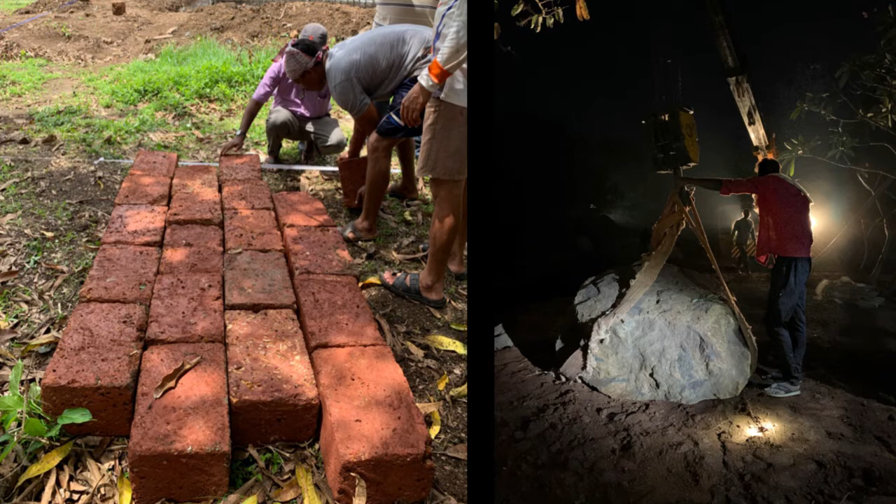My design process is a non-linear one, where I practice with immense joy of making, where I involve and participate myself in the building practices, be it arranging the laterite blocks for the paving or locating the large boulders into the site or into the landscape.

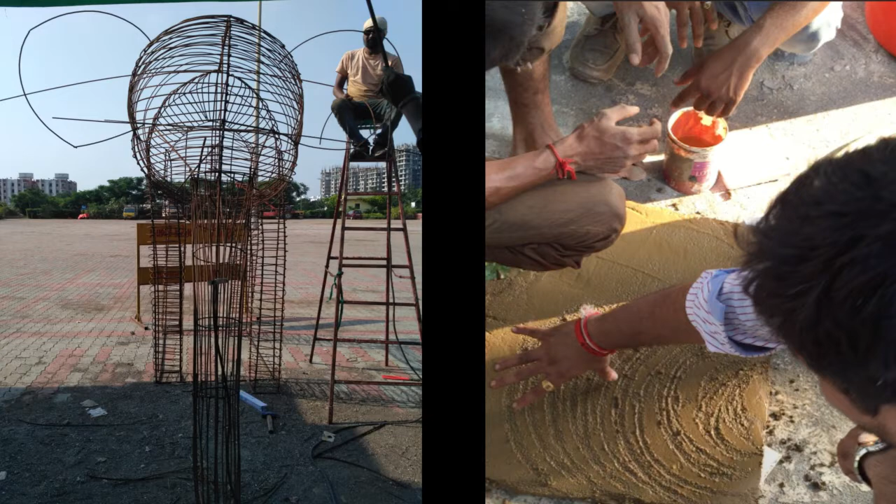I try to involve myself with the conversation that happens at site, engaging with various aspects of the site, which really folds and unfolds the design process. There is a joy in witnessing this process of making, which defines my practice.

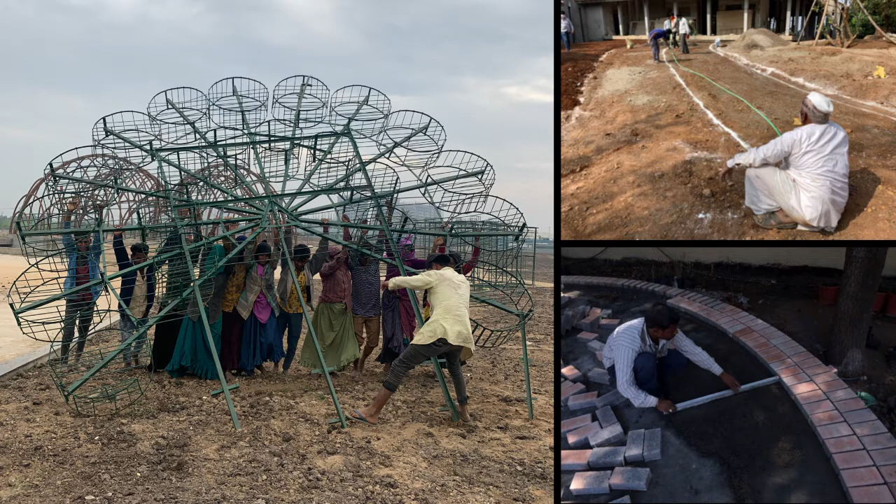I would like to share this experience through few of my projects. To start with, first, a natural ice cream parlor in Juhu. The brief given was to create a unique experience with nature, as the brand is called Naturals.

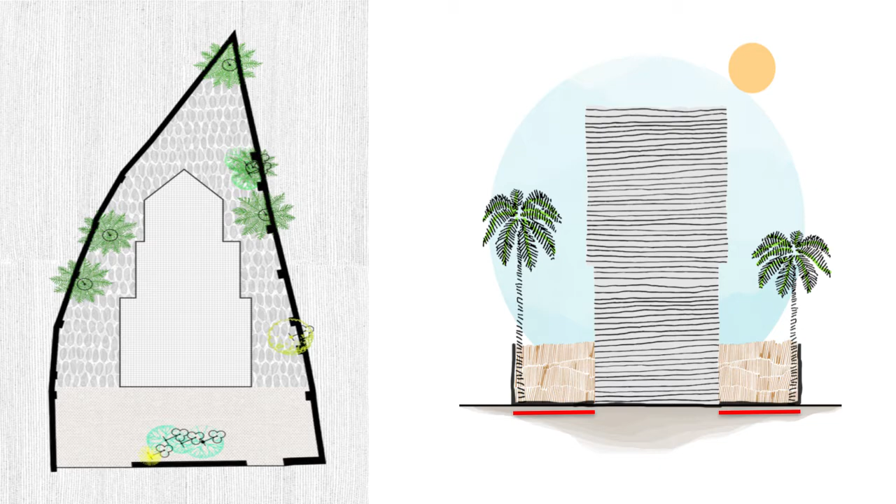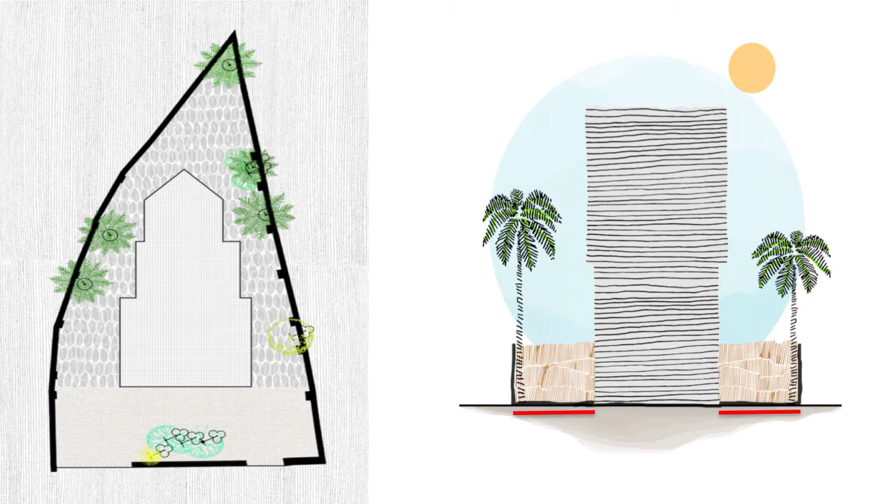The site is a triangular plot with a narrow marginal space of 5 to 6 feet, which was the only outdoor area of the experience. The design aimed that it should look less like a store and more like a park. That was very challenging, and we started this whole approach to create an enclosure which cuts oneself from the hustle bustle of the city.

The idea was to create the canopy where the structures become almost invisible and the creepers take over the space. It was detailed in such a manner that simple rectangular frames connected with thin wires would allow the creepers to go over it and make the space.

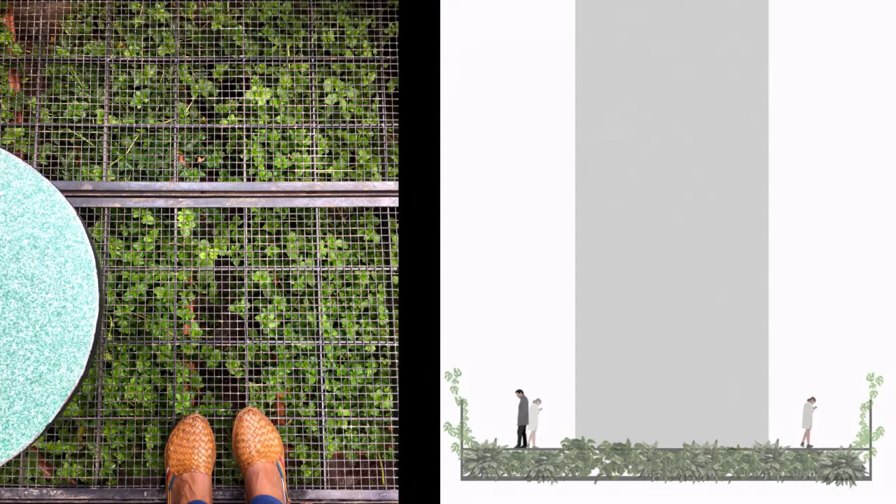While doing this, we realized that what if we could explore the floor too? As part of this whole experience, we imagined what it would feel like while walking over the greenery. That would surely give a different dimension to the space.

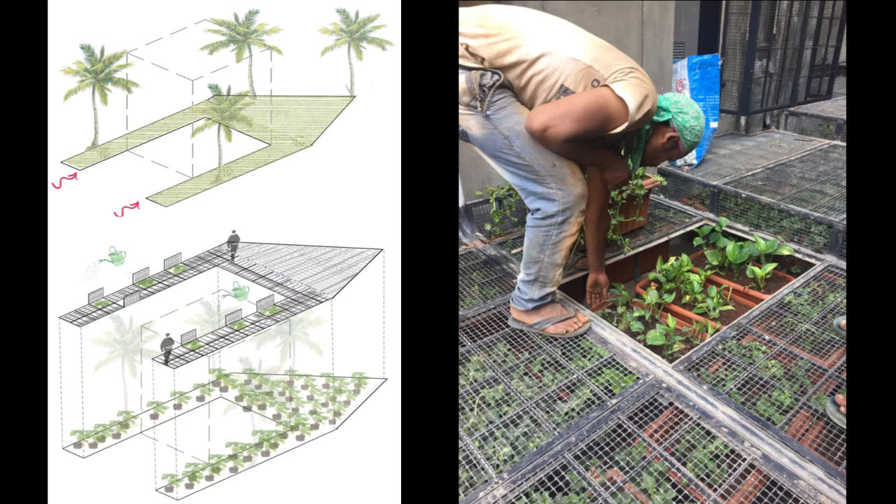We further developed this idea and made customized wire mesh panels, detailed in a way so that it could be easily maintained. Being a commercial property, it was important to consider the maintenance, where one could water the pots or clean accordingly, and easy to lift.

We placed around 450 pots beneath the jali and created the floor surface to walk over it. This is what the space has grown to - it has almost become a cocoon which gives a unique experience.

The light penetrating through these creepers creates an interesting pattern on the various surfaces of the space. The punches in the canopies bring back memories of a walk in the woods. The twisted branches take me back to the space that I was inspired by earlier.

The next project is BKC Sculpture Plaza. The site is located at Kalanagar Junction, one of the busiest junctions in Mumbai. The site was envisaged to be an entry point to BKC. The vision and design of the sculpture was already finalized before we came on board.

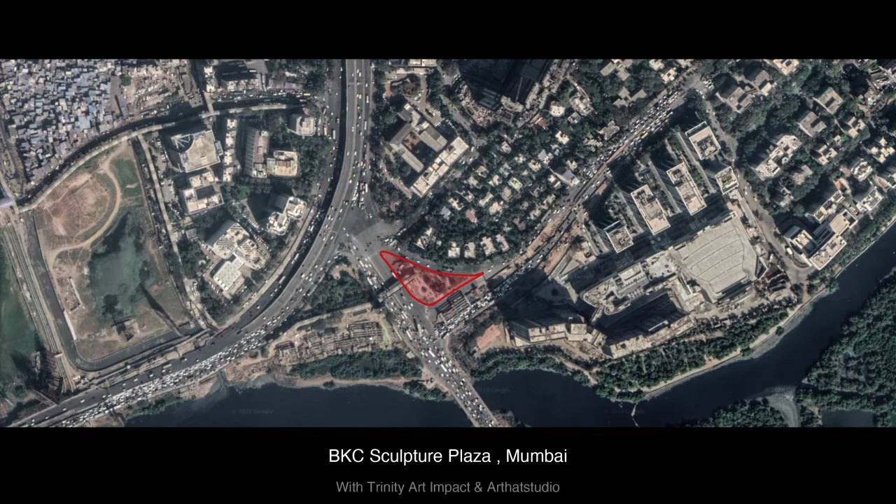The site is surrounded by roads on all three sides with constant vehicular movement. This area is busy not only in terms of vehicular traffic but also pedestrian movement, where one daily commutes from one end to the other. This made us realize that we should create a space which will become a pause point for the daily commuters.

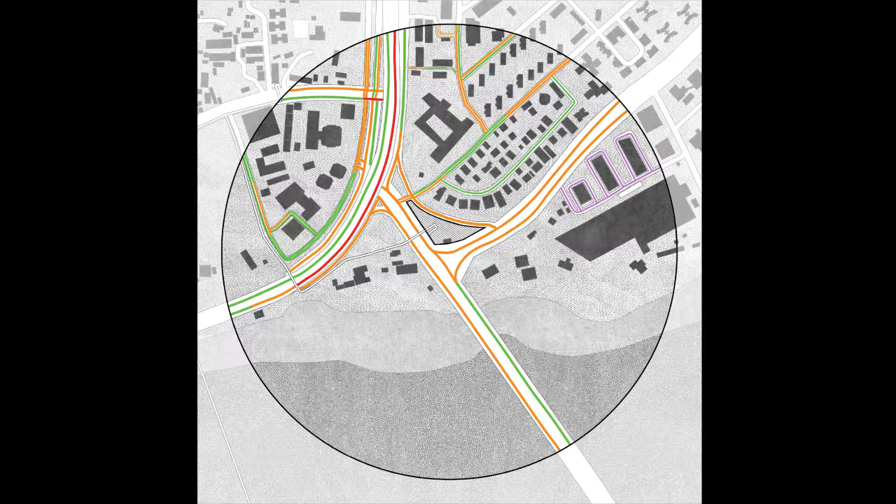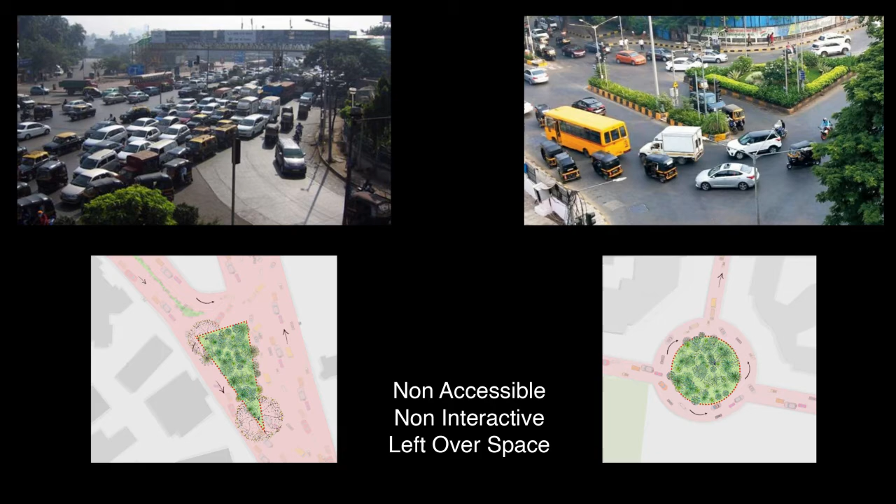We did a quick study to understand how traffic islands were treated and imagined. We realized most of them were either non-accessible, non-interactive, and almost felt like a leftover space in the city. The existing site was treated in a similar manner - it was in a state of abandon.

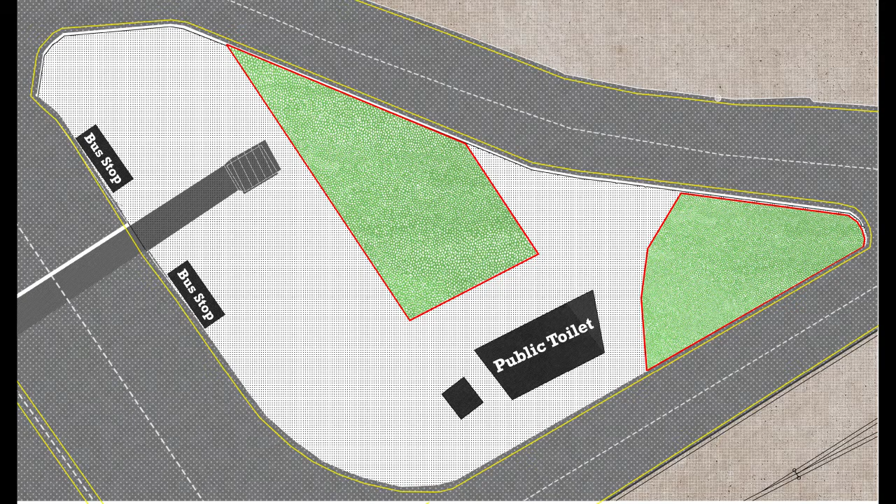The entire island was divided into three parts: paved, green and utility areas like toilet block and bus stops. These three separated spaces acted as independent entities. The existing garden was a non-interactive space, treated like a so-called green patch.

We thought of spreading these green areas evenly throughout the plaza. The benches were very well placed and designed, which looked as if they emerged from the BKC sculpture. Even the paving was evolved from the geometry of the sculpture.

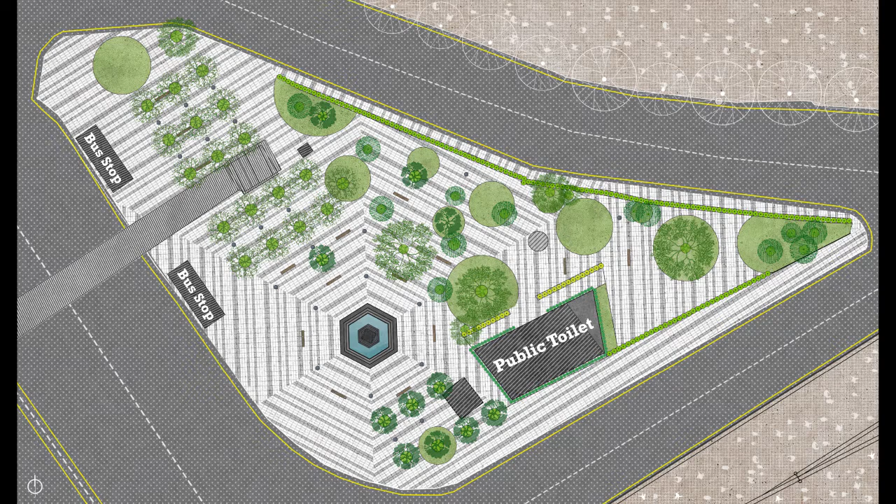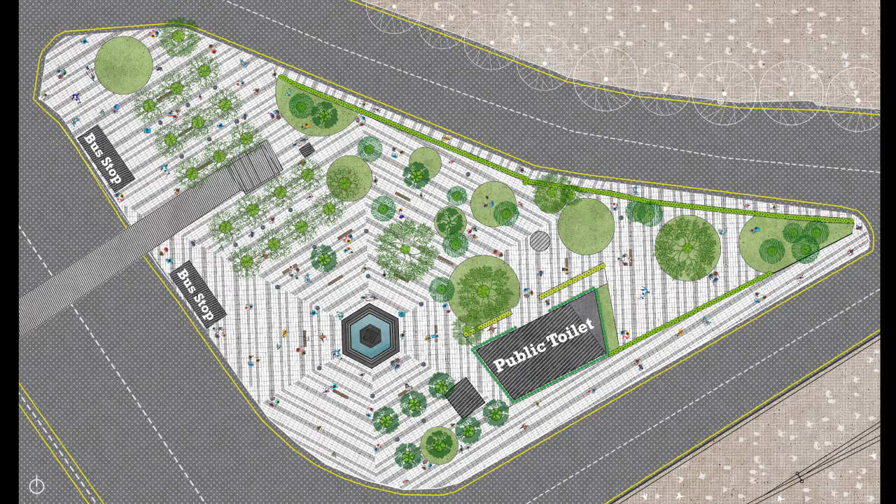The benches were carefully placed near and under the trees, as well as facing the sculpture. The plaza now functions as one entity where one enjoys the different experiences of pausing. So this is how that space has come up.

The space allows one to sit for a while. We imagined this place where one can have a quick nap, lunch, chat, read, discuss or write.

The lighting was also carefully designed with a set of simple linear poles so that it could light the space evenly in the night. It was also important that it doesn't look bright and stand out within the space, and almost creates an extension of the BKC's corporate structure language.

Last project that I would like to talk about is Avasara Academy. This project is a very important part of my learning curve and the way I practice. Just to brief you, this is a residential school for young girls located in the outskirts of Pune. This project had various collaborators, with architect Case Design, Rameshwarji, Abhijit Pandya, Malika Mama — these are a few important people which helped us in shaping this project.

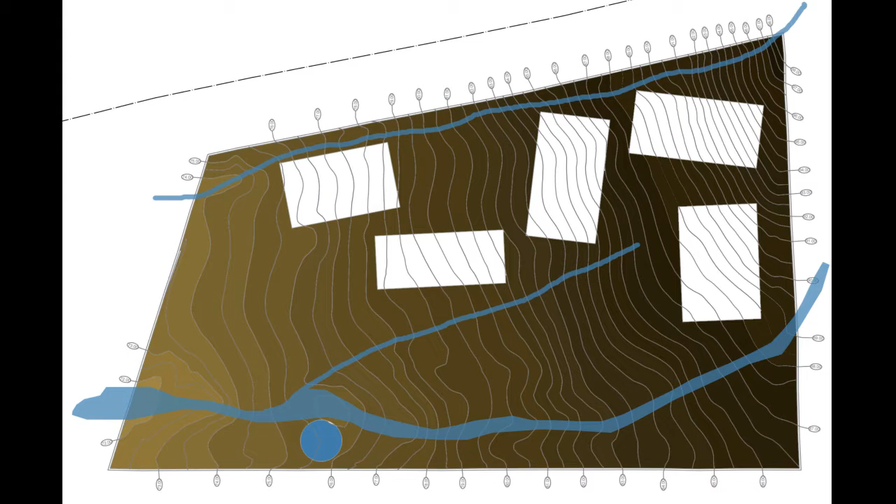We did a basic slope analysis and tried to create or tap primary streams running through the site. We did a lot of water related studies. Various options were explored that could allow us to harvest water, like mini check dams, rainwater harvesting ponds, and swales — they were part of continuous explorations.

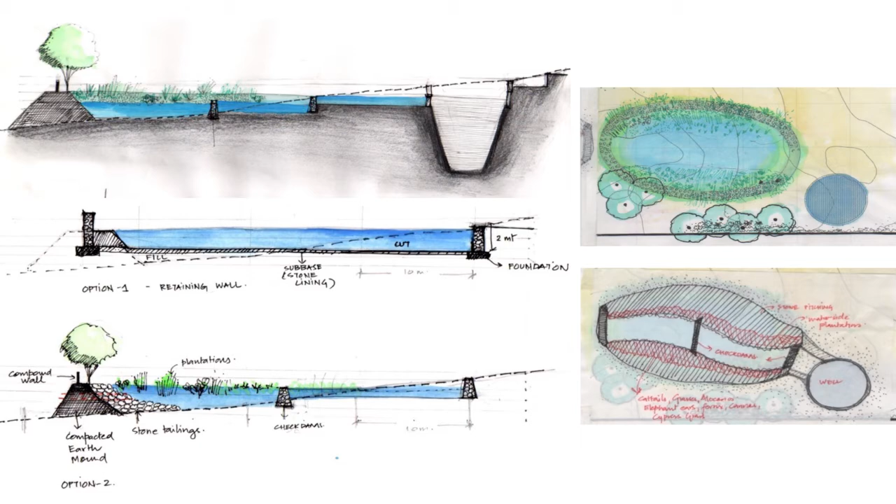The master plan kept evolving with time and conversations that happened with various collaborators. It was never constant — we always had a little bit of shifting here and there, arranging and locating every aspect of the landscape, while also considering the built form.

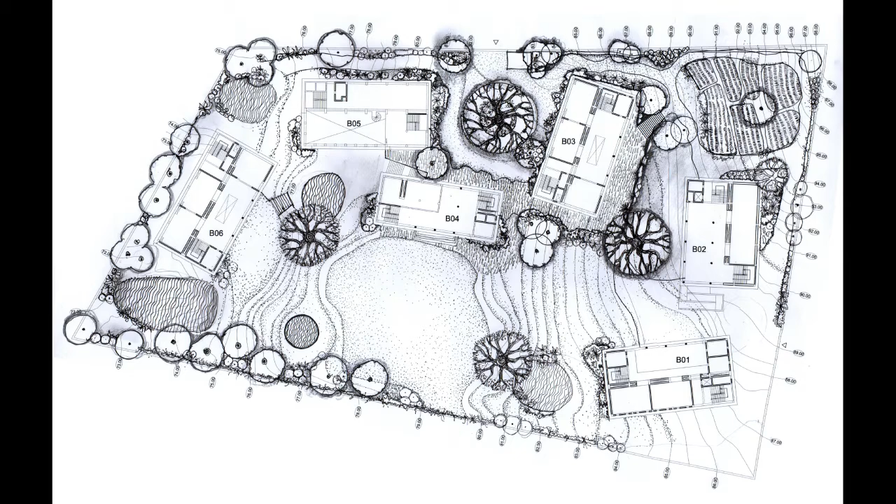While developing the site, the prime focus was to use local resources and techniques which would be cost effective as well as appropriate for the site. Costing was a very critical concern, which shaped landscape strategies like local farming, local construction methodology, and setting up a plant nursery — these were the few things we thought most appropriate for this kind of site.

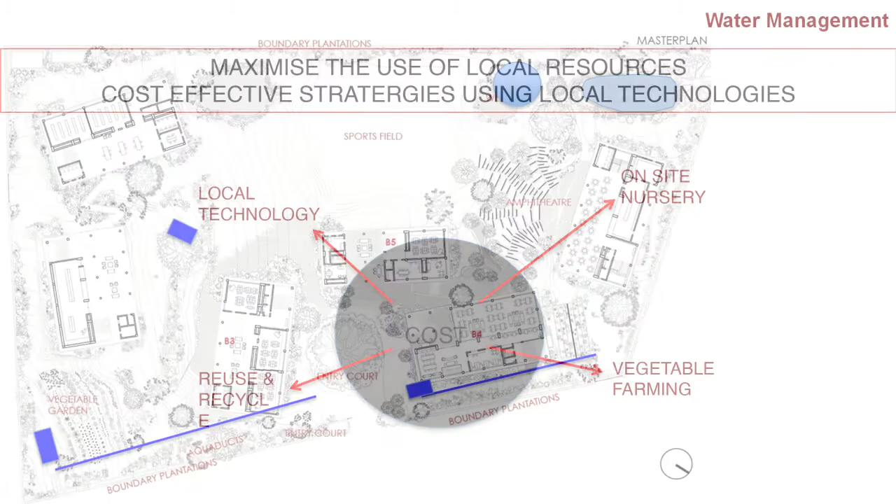The water management plan was developed in reference to the previous studies we made, which I would like to explain in detail. These rectangular blue boxes are the landscape tanks, the linear lines are aqueducts, and there's the location of the existing pond and polishing pond. The only source of water at the site was the well.

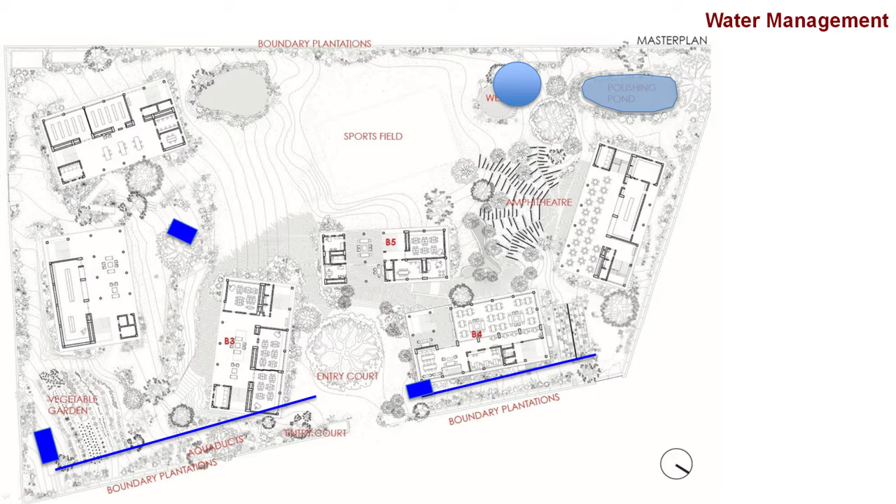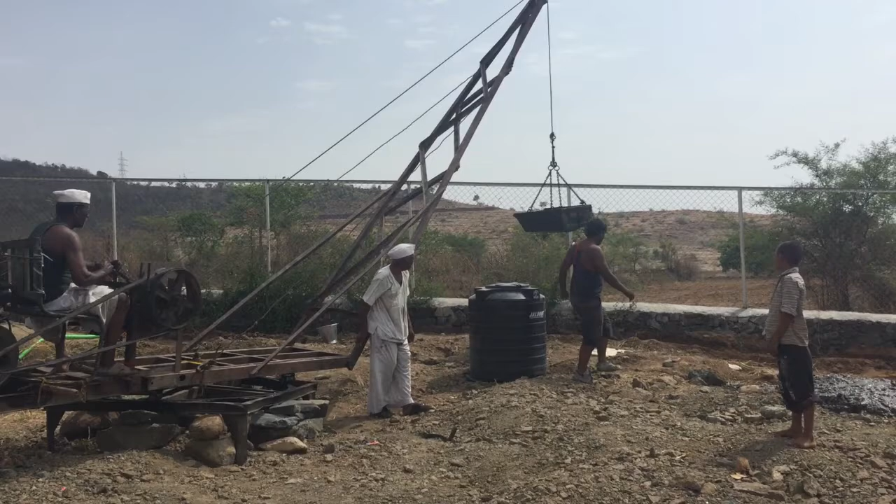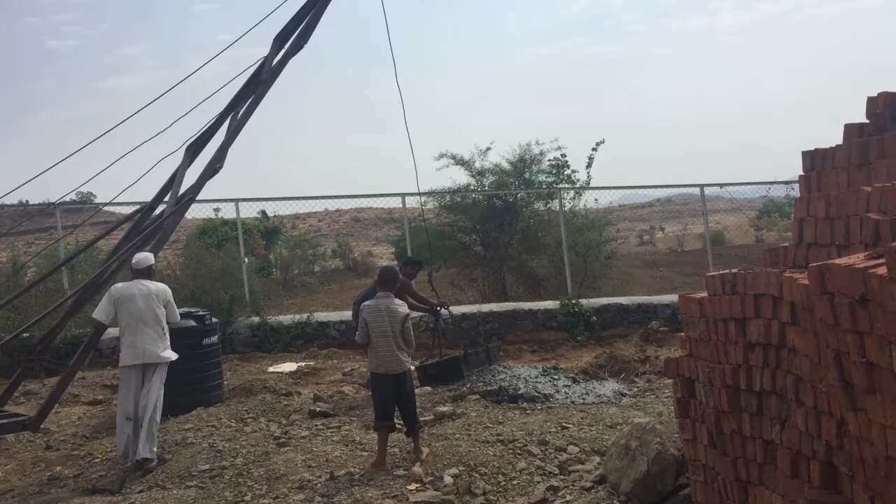So we started dredging and constructing the well as part of the first program of implementation regarding water. This is a diesel pump operated dredging device which was locally sourced and used for cleaning up the well. This is how they cleaned up the pond and the dirt beneath the bottom of the well, which had been lying there for years.

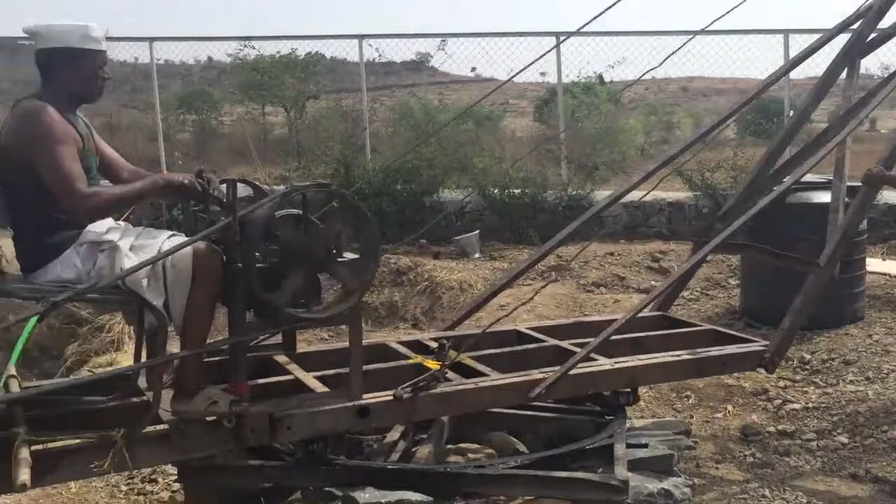We involved local people who knew how to construct wells. They exactly knew which was the best time to clean and make the well. We gradually formalized the well. This kind of small interaction helped with sketches or no formal drawings, so we almost did everything on site, measuring it and calculating the depth of the water. All of this happened with constant presence at the site and collaborating with the local people.

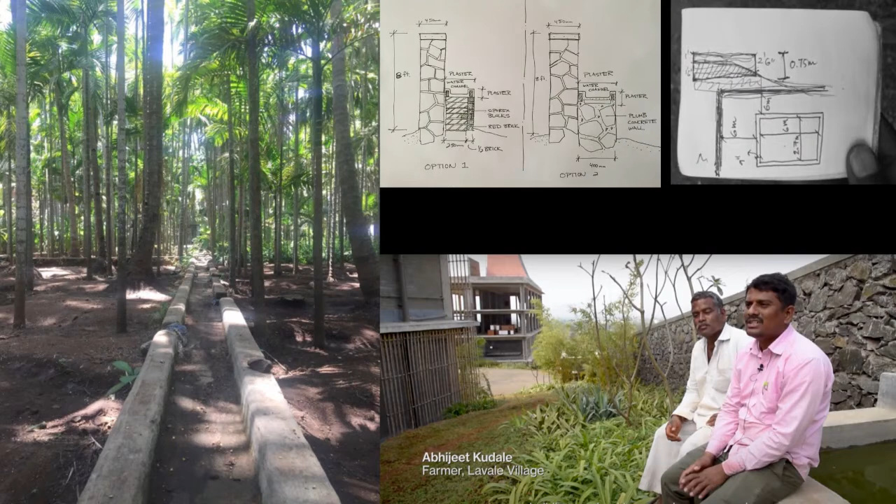While in conversation with local farmers, we adopted the traditional irrigation system of aqueducts that carry water to the orchard. We thought this could be very important because the site is sloping. So we created a network of aqueducts and water tanks at various intervals, which can irrigate the landscape areas with the help of gravity.

There is a small video regarding this water channel. We took inspiration from the local farmers and the way they utilized it, processed it, and distributed it across their land. For us, it became a really important element to understand as a sort of life source for the campus.

One of the other aspects is the polishing pond, which is like a grey water pond at the lowest point of the site, where the grey water from the toilets filters through the reed bed and is collected here. Since there were no human resources, we ourselves had to participate in marking and calculating the slope. This all happened on site, and on-spot decisions were taken with the local people.

One of the other aspects is that, being on hardy strata of the site, we had to do a plastic lining in order to hold the water. This water is again reused for landscape irrigation. This is what it looks like when there's full occupancy in the campus.

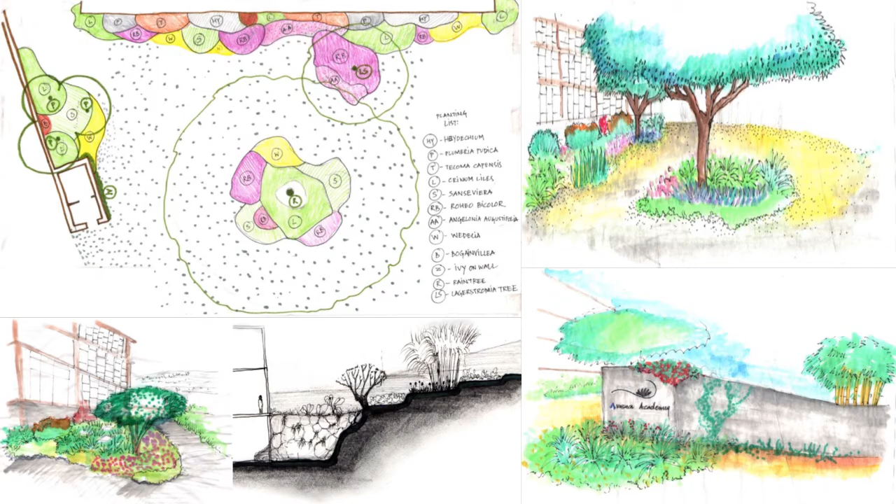During the initial stage of the design process, planting was a very important part of the campus. We parallelly started setting up a nursery so it could be cost effective when buying smaller plants. Planting design was carefully made, keeping in mind all the factors at the site. We tried using a lot of hardy species and bulbous plants that could multiply over time, which we could use all over the site.

The planting happened in various stages. As the buildings were built, we started shaping planting around the built forms. These are a few of the planting plans that we designed. The process of planting was very unique - once we bought the plants, that was a different story: what do we do and how do we space and plant them? We designed the space with mixed planting, which not only gives character to the space but also offers variety across the campus.

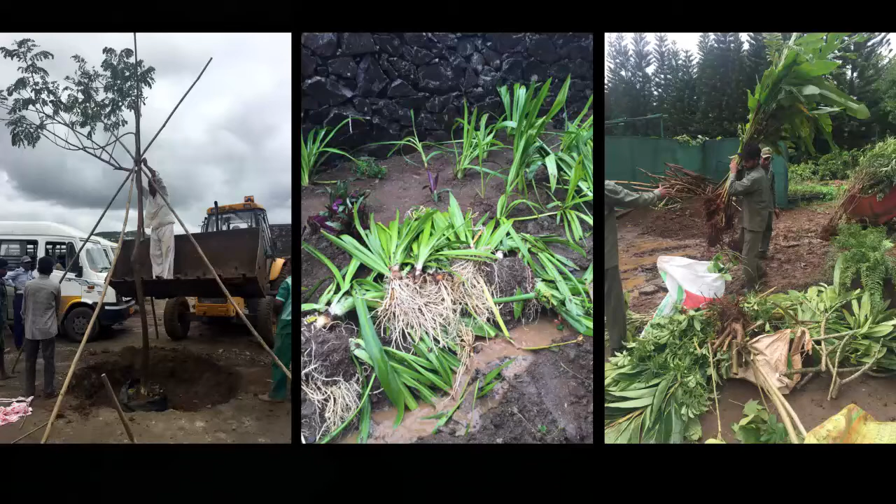During conversation with the local team, we realized that with all the bulbous plants that multiplied every year, we could uproot them during the monsoon when the soil is loose. This allowed us to save cost, where two bulbous plants become three or four every year, which we could then plant all over the campus. A few cuttings were taken so they could be planted at the right time during the monsoon, again becoming part of the planting process.

Girls, the most important part of the campus, were very much engaged. They developed and understood this whole business of how to maintain our gardens, involving themselves and forming teams that could maintain parts of the landscape areas. I think this is a very important and valuable point - how this campus is shaped while promoting the idea of leadership for the girls.